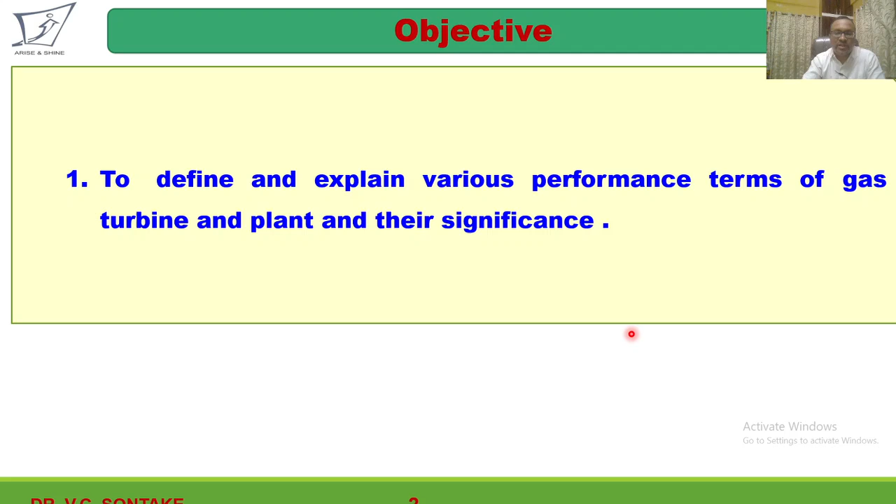The objective of this video lecture is to define and explain various performance terms of gas turbine and gas turbine plant and their significance. So let us discuss various performance terms related with the gas turbine and gas turbine based power plant. The very first term is the cycle air rate represented by AR.

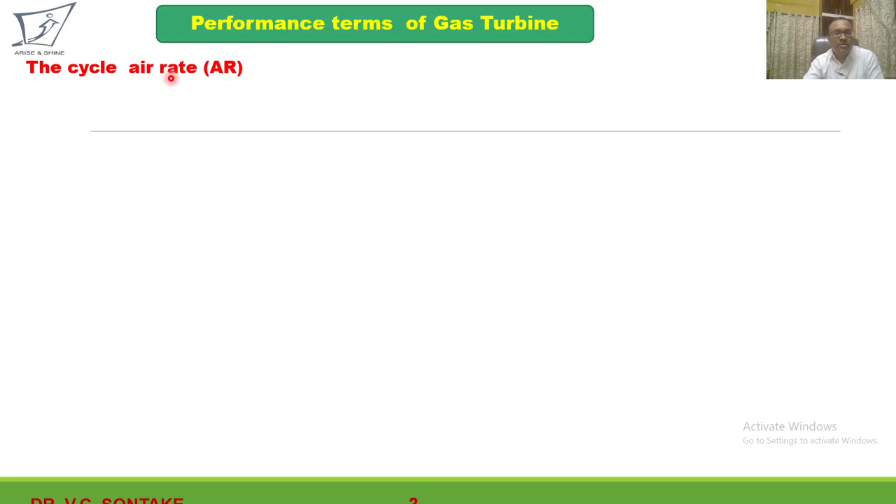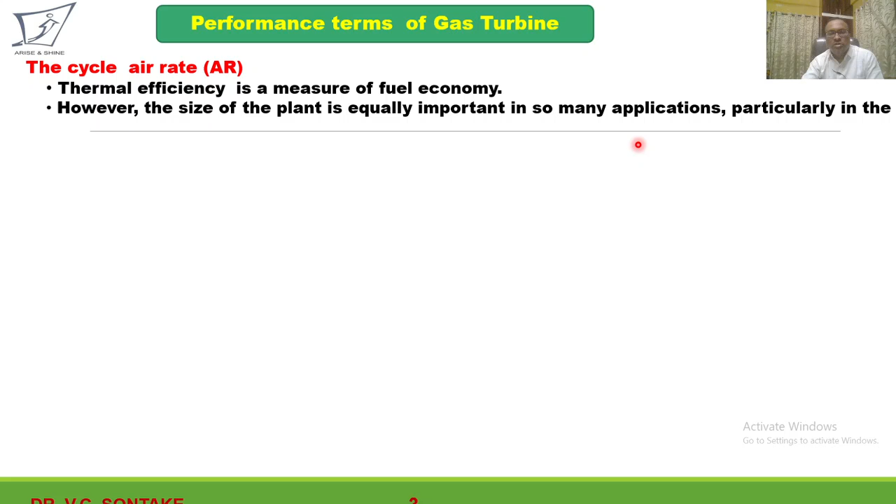Now, in case of gas turbine, thermal efficiency is a measure of fuel economy. However, the size of the plant is equally important in many applications where the gas turbine based plant should be compact, like in the field of aviation. So the size of the plant depends on the flow rate of air in relationship to the useful power output.

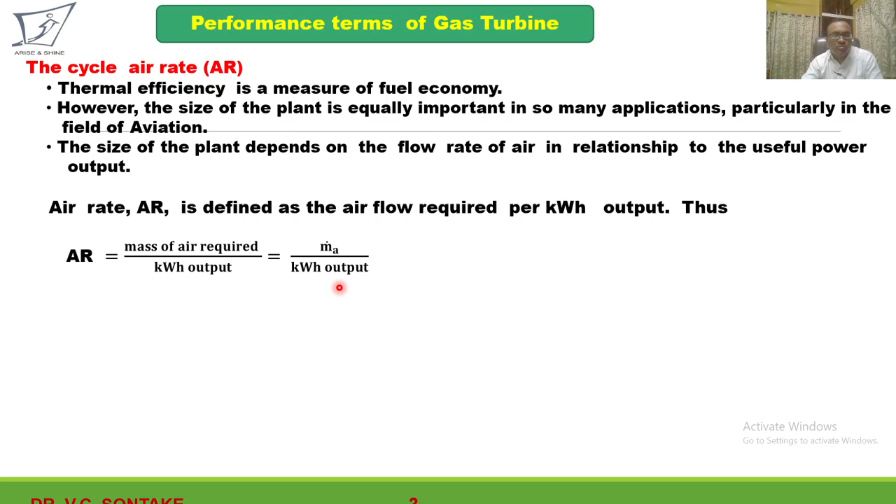Air rate is defined as the air flow required per kilowatt hour output. Thus, air rate is the ratio of mass of air required to produce per unit kilowatt hour output. Air rate can be given as m dot A over kilowatt hour output, where m dot A is the mass flow rate of air.

Representing kilowatt hour output in terms of m dot A into network output in kilojoule per kg, simplification of this will give me air rate as 3600 divided by network output in kilojoule per kg. So air rate can be given as 3600 divided by network output in kilojoule per kg, and unit will be kilogram of air per kilowatt hour. The reciprocal of this air rate is termed as specific power.

Significance of this air rate. Air rate is actually the criterion of the size of the gas turbine based power plant. That is, lower the air rate, the smaller the gas turbine based power plant.

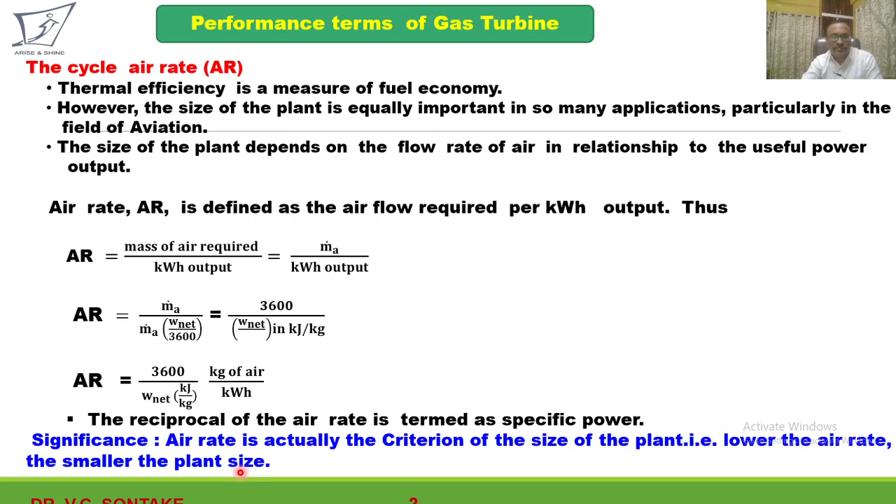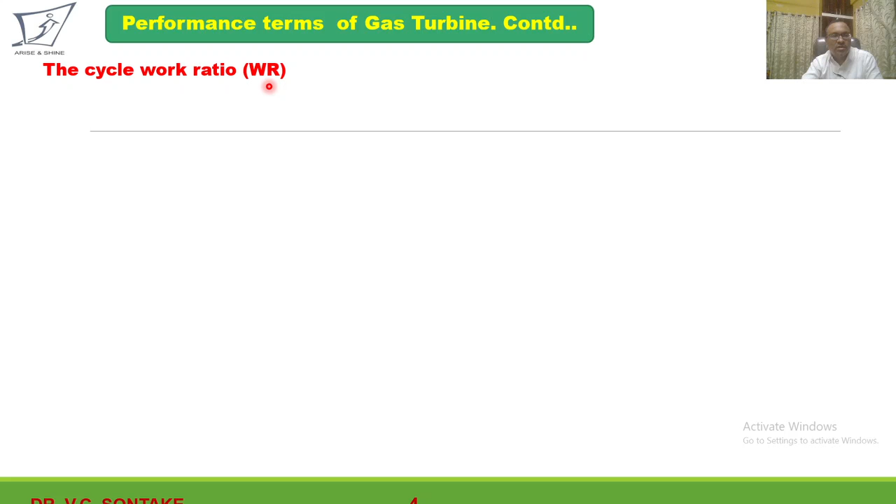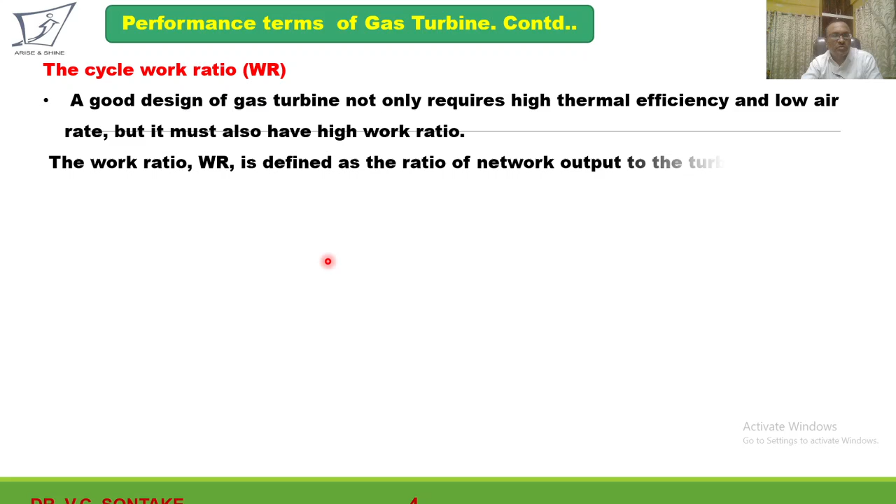The next performance parameter related with the gas turbine is cycle work ratio WR. Now, a good design of gas turbine not only requires high thermal efficiency to increase the fuel economy and low mass flow rate of air for a small size of the power plant, but it must also have high work ratio. The work ratio WR is defined as the ratio of net work output to the turbine work. Mathematically, work ratio is equal to the ratio of net work output to the turbine output.

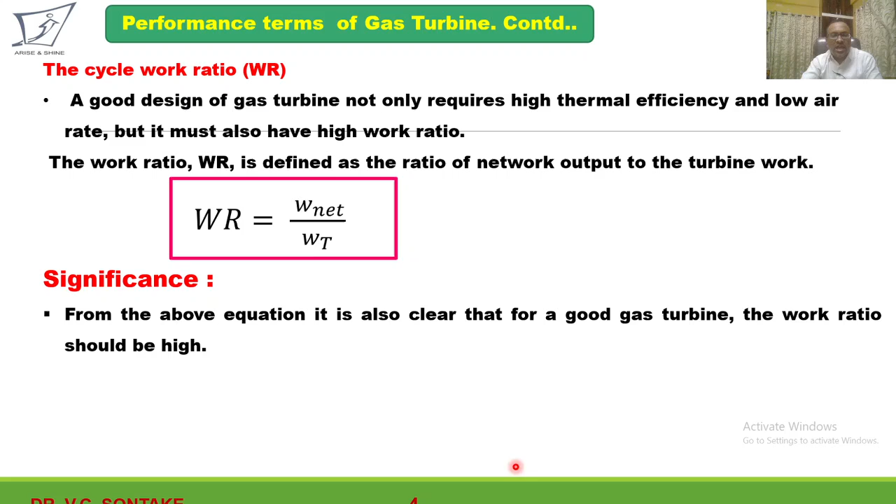Significance of the work ratio. From the above equation, it can be shown that for a good gas turbine, the work ratio should be high. The work ratio may also be used as a guide in the determination of the size of the gas turbine and as an indicator of the sensitivity of the plant to the component efficiency. If work ratio is high, the size of the gas turbine will be smaller. So we can decide, to produce a given amount of network output, what will be the size of the gas turbine by calculating work ratio.

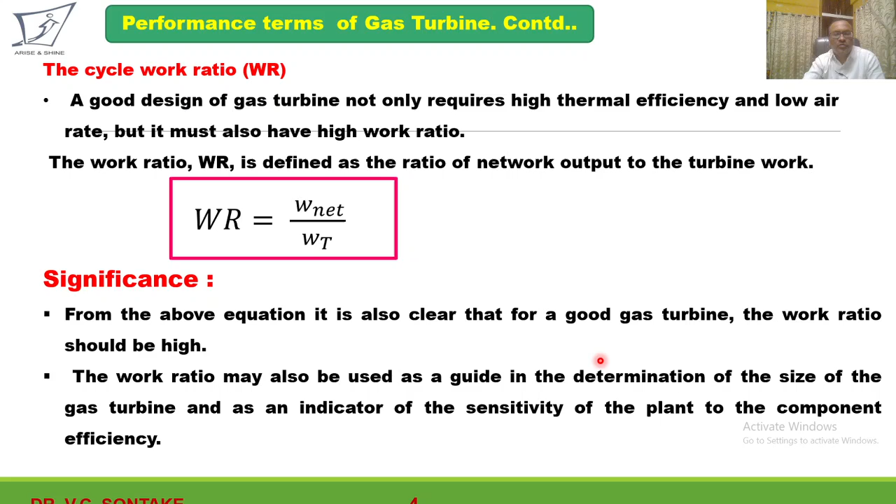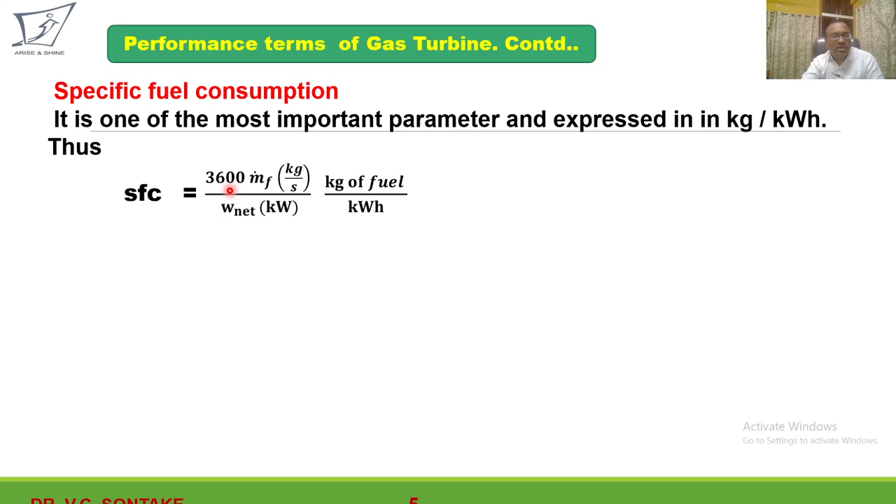Next parameter is specific fuel consumption. It is one of the most important parameters and expressed in kilogram of fuel per kilowatt hour. Specific fuel consumption is defined as the amount of fuel required to produce unit work output. So specific fuel consumption can be given as 3600 into m dot f, that is mass flow rate of fuel in kg per second, to the net work output, and unit will be kilogram of fuel per kilowatt hour. This can also be given as 3600 into ratio of mass flow rate of fuel to the mass flow rate of air to the net work output in kilojoule per kg.

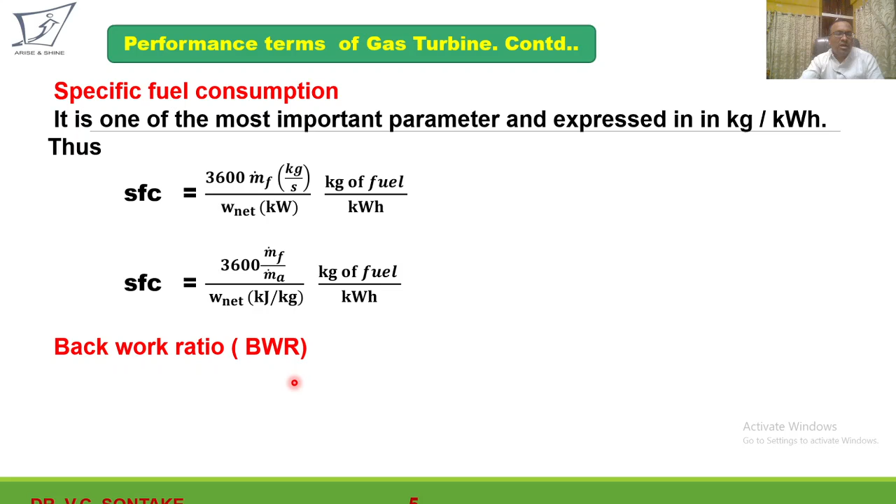The next performance parameter is back work ratio. Back work ratio is defined as the ratio of compressor work to the turbine work. So back work ratio can be given as compressor work to the turbine work. The significance of the back work ratio is that the less the value of back work ratio, the less work input will be required by the compressor, and net work output will be increasing.

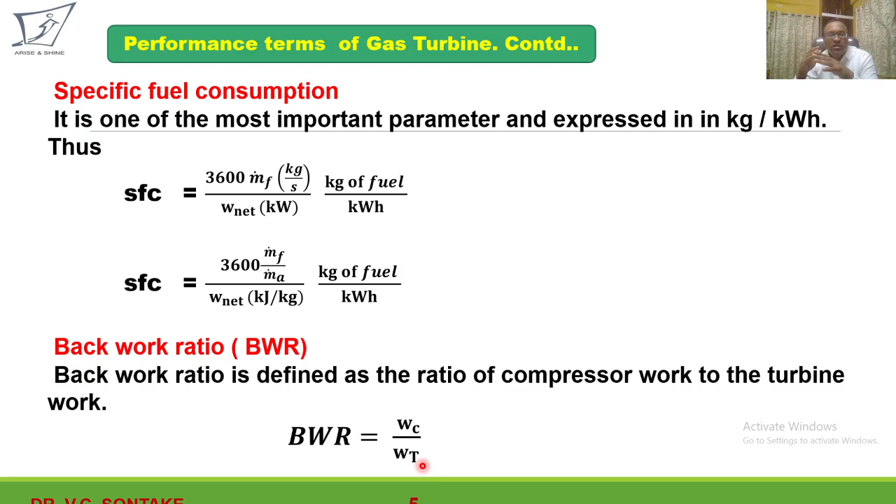After watching this video, you will be able to define and explain various performance terms of gas turbine and gas turbine based power plant and their significance.